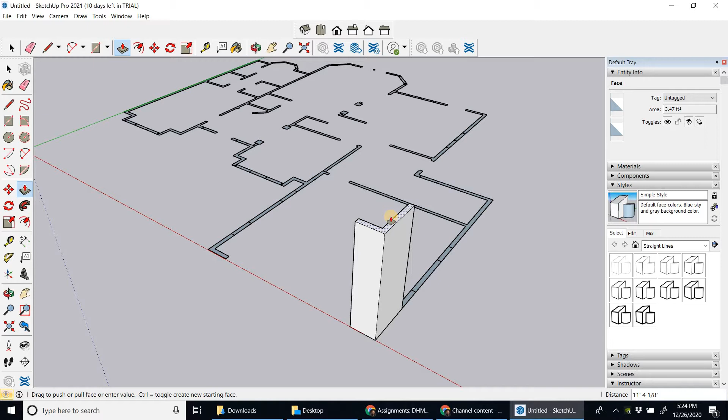The next step is to extrude the walls, and it's quite easy by just using the extrude tool, the push pull tool. So I'm going to click on push pull, and the height of these walls should be about 11 feet. I just click and drag, type in 11 feet, and press enter.

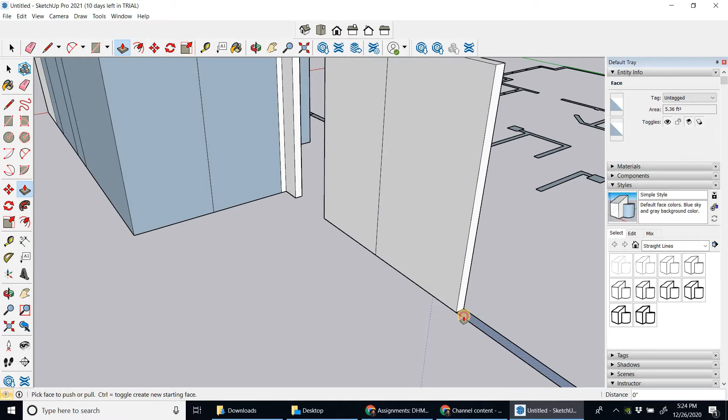Now the next thing is I don't have to enter the number every time. I can just double click, and SketchUp has a way to remember the last command. So I'm just double clicking here, and it's extruding all the walls. I'm going to go ahead and extrude them as much as possible to complete my walls.

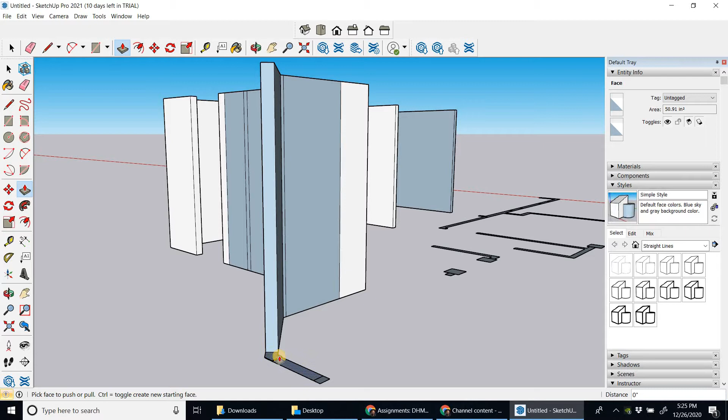As you can see, there are some blue walls and some white walls. Now this one I made a mistake, so let's fix that - I need to give it 11 feet again. There it goes, perfect. Ideally, we want all the walls to be white in color.

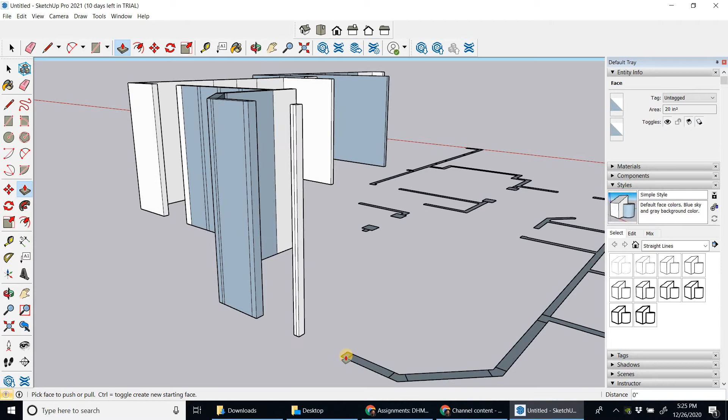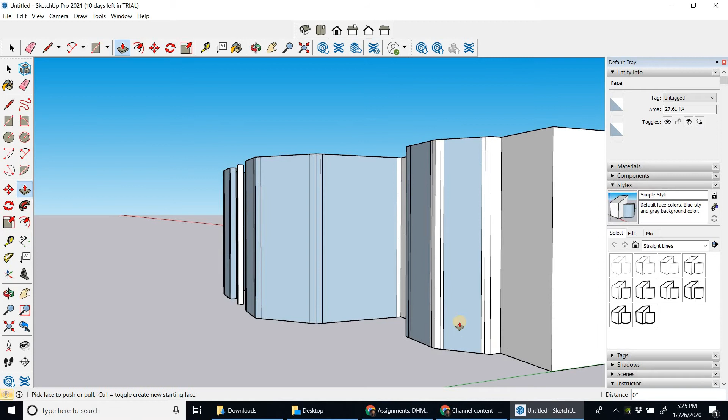There is a reason for that: in SketchUp, a face has two sides, the back face and the front face. The front face always looks white. What we're seeing here, the blue one, is actually the back face, and we want everything facing the right side, because sometimes the materials and textures go wrong if you have them on the wrong face.

So you want all the faces to be facing correctly. We can easily do this by right clicking - I'm going to select the face, right click, and say reverse face.

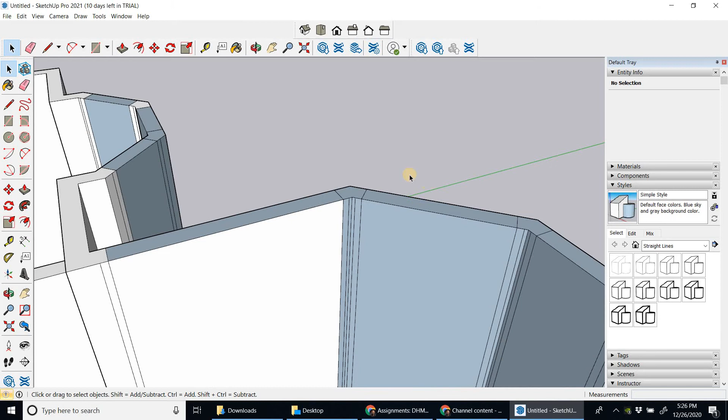Now it's going to be a lot of work to actually go ahead and do all of these, but say you have a group here. I'm going to undo this one I just did, then reverse face again to make it blue. When you have a group like this, I'm just going to select all of it, right click, and say reverse face. Now all of those become white.

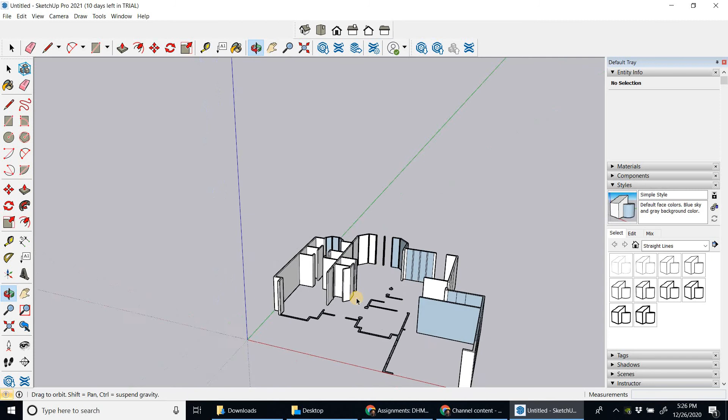So at the end of the day, I want everything to be white. Once I complete the plan, all the walls should be white. Then just fill in the gaps here - on the outside there are some gaps here and here, so we can fill those in as well once we complete the walls.

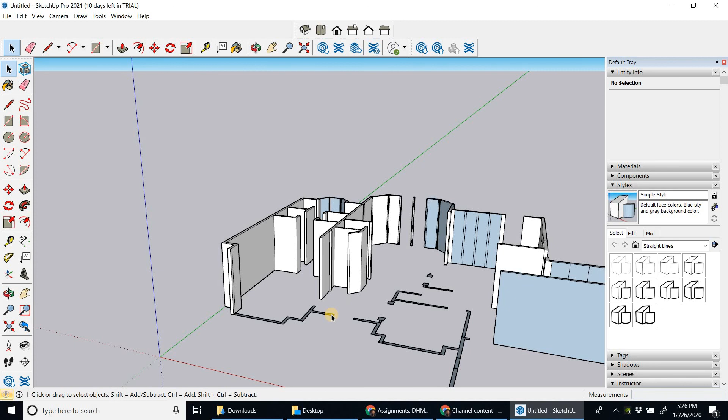In the next video, let's see how we can add windows and doors into this, bringing them from the warehouse.